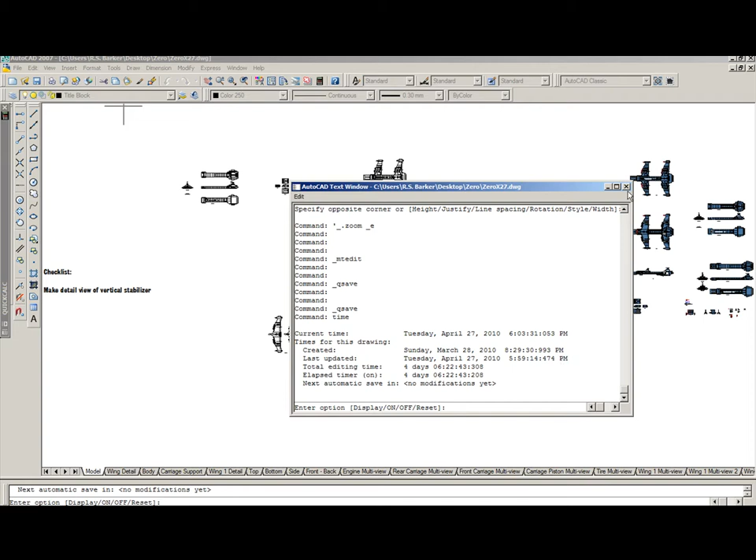So right around 100 hours total is the creation time on these. I've got my little checklist over here of things I still need to do, which is a detailed side view of the vertical stabilizer on the wings. So let's go ahead and get right to it.

There's a lot of information here to present to you, and I've got them broken down pretty much on the left hand side. I'm going to make this DWG file available to you. It's about 2.1 meg in size at this time. It will open with AutoCAD, pretty much any version. This is 2007.

I'm just going to show you some basics here. This is the wing root and the side view of the wings. Wing root, wing tip, and wing base. If you're unfamiliar with that, I'll show you what the wing base is here in just a moment.

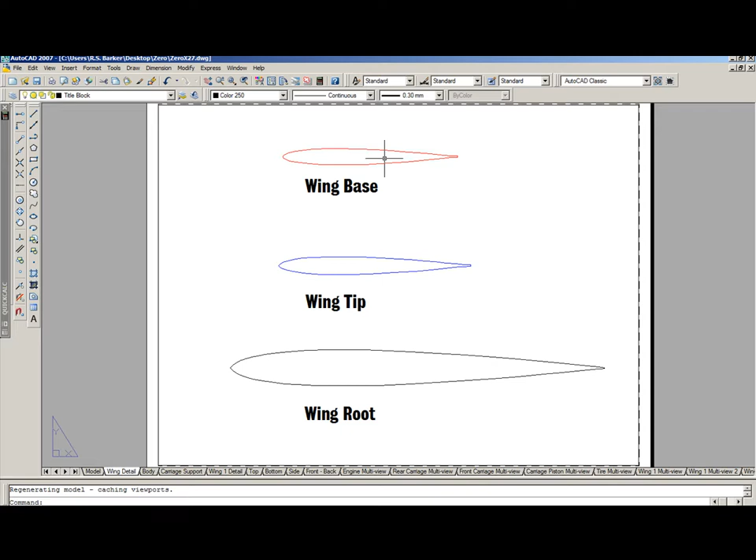And then we have some more detailed information on the front body, or I should say this is just the main body, including the cabin. Just going to kind of zoom around here so you get some idea of what you're going to be getting in this package, and all the drawings there.

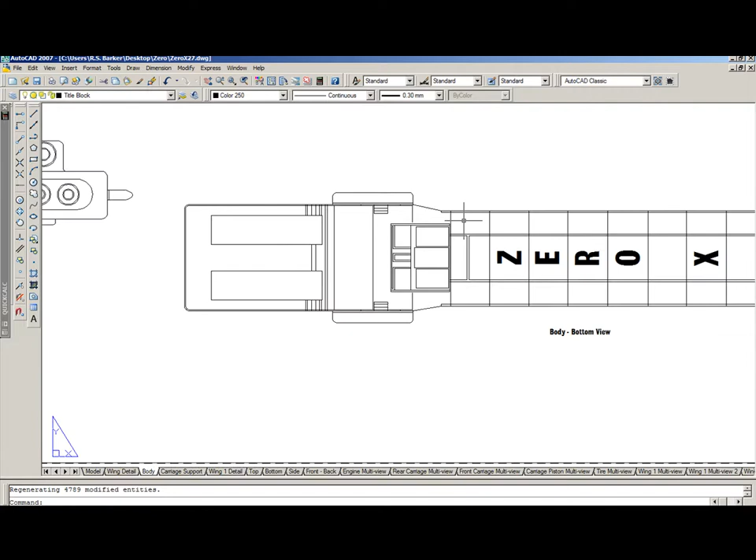On these, I left off the carriage and the wheels just so I would have a little bit more. I could save those for drawings like this. This is a 3 view of the main carriage that is on most of the wheels and their support systems on both the Zero X Wing 2 main body and even Wing 1.

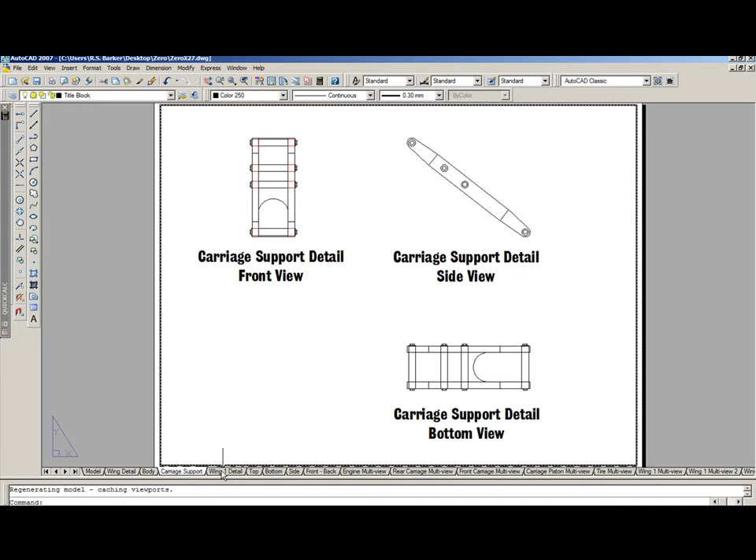And then we have a side view of the wing itself when it's in the folded down position. Again, we can go ahead and zoom on this. This little detail here, the blue is actually behind the red, which are hidden lines. I've got those just normally set up as well too, so you can see those.

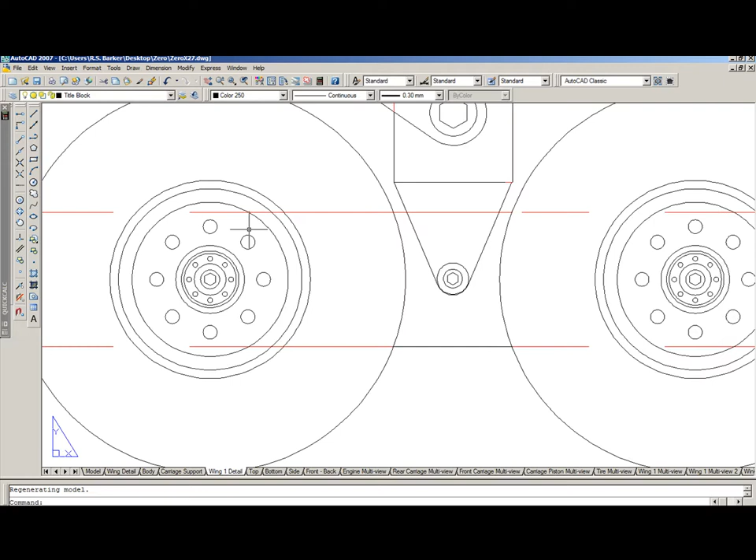You may have to click View and Regen if you decide to open this with AutoCAD. It just recreates these as circles instead of being hexagonally shaped. That's just a little snafu that happens from time to time within AutoCAD.

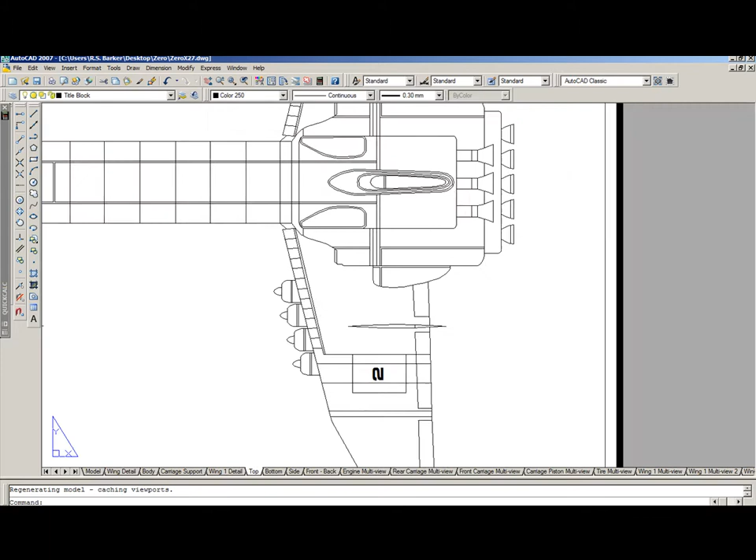Then we have the top view. This is actually where you can see this wing base at. I've got it lined up here. So your wing root would be where it connects to the wing base or to the wing itself, and then we have the wing tip and then the wing base, and that's a negative pull on that. I've actually got those laid out pretty well, but you just get some nice details on this.

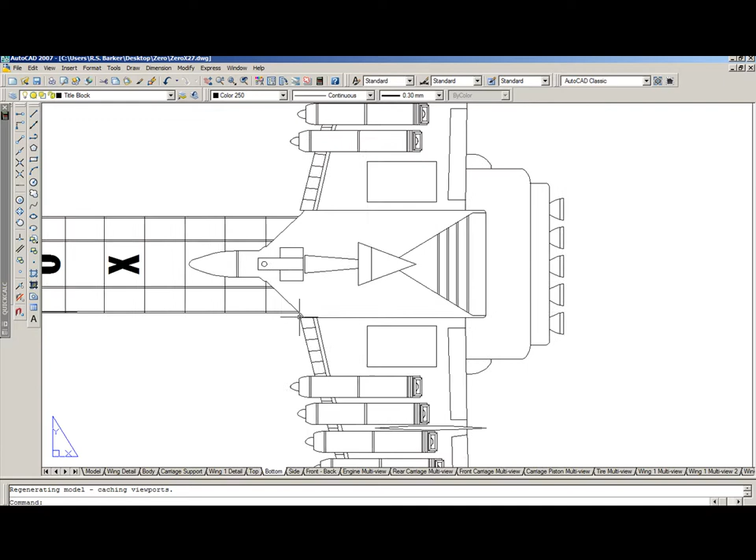And then we have our bottom view, which has really a ton of detail, specifically when it comes to the engines, the Zero X, which of course now, if this was colored, it would be white. I've got them showing up as black right now just so you can see the lettering and where it goes. And I've got these rear areas open, so it would show you where the landing gear would be at.

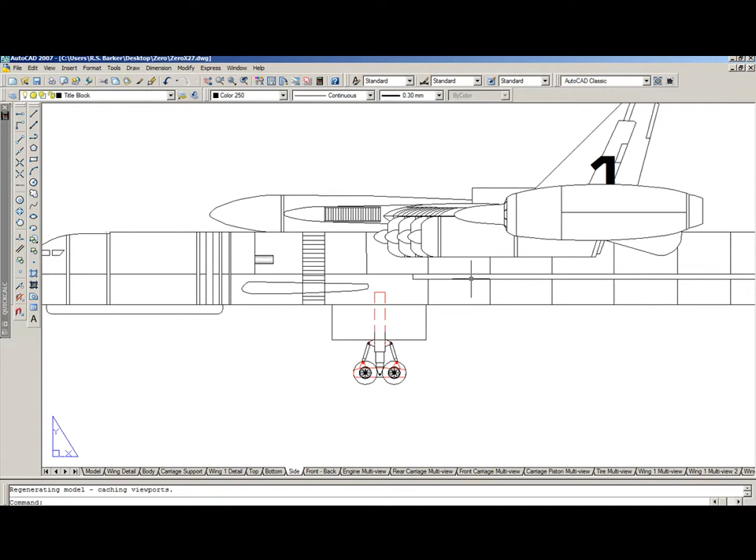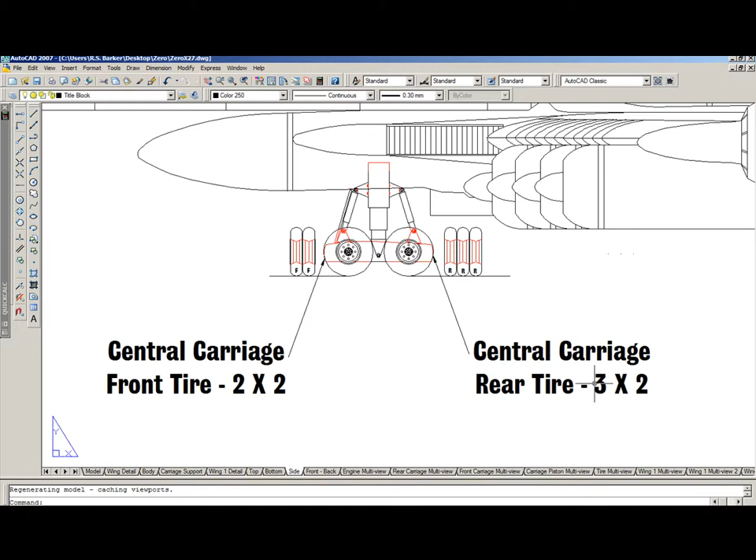Then we have a side view, which has a little bit more detail. It's going to kind of vary from drawing to drawing. Here we've got some details on the front and then the rear, and I even explain this just because in the side view I don't have a 3D view of this at the moment. So like the front of this number 2 wing has 2 tires on either side of the axle, and the rear has 3 on either side of the axle, so it's 2 and 3, and that's just a little bit more information there.

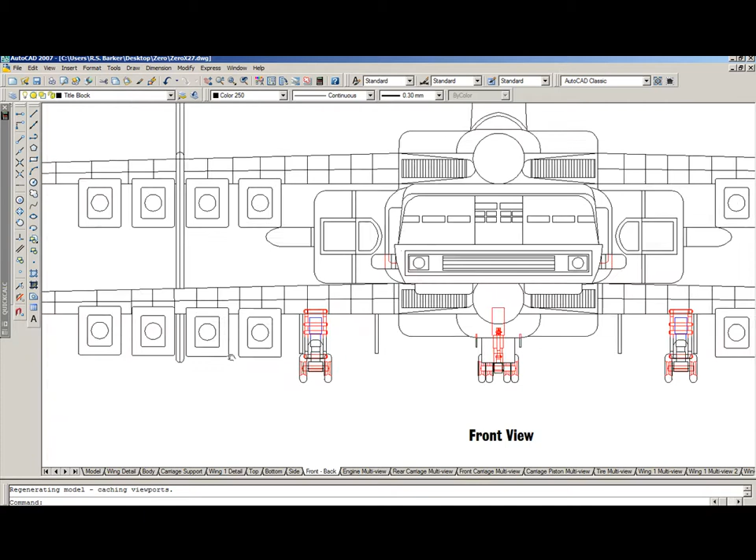And then we have the front back view. Tons of detail here. Again, this may not be perfect. I busted my butt to try to get these done as quickly and as accurately as I can. And I've been correcting and going through and doing little changes here and there, just to bring out more details. I don't know how much is too much. I don't want to go overboard.

This is the multi-view of the engine, including a hidden view from looking at the top of it. I would be looking down on it from the top of the wing, and then the bottom view, and then of course the side view, front and back.

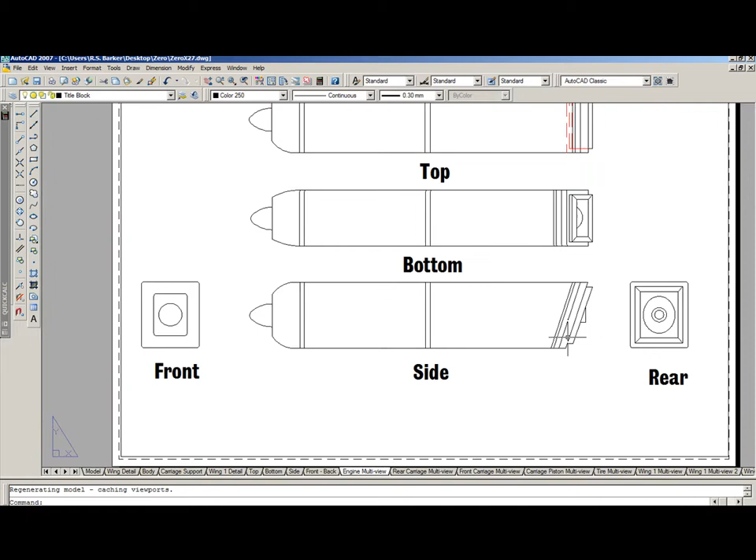And then we go into the rear carriage. I'm not completely satisfied with this, just because I can't think of his name at the moment without going to the forum, but someone said this kind of has an arc to it. I don't know, it's just one of those things that if you can give me better evidence of that, I would be really appreciative of it.

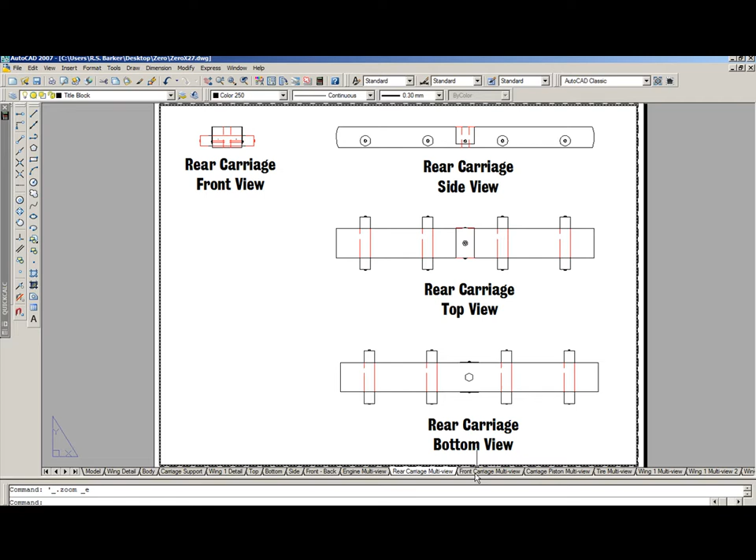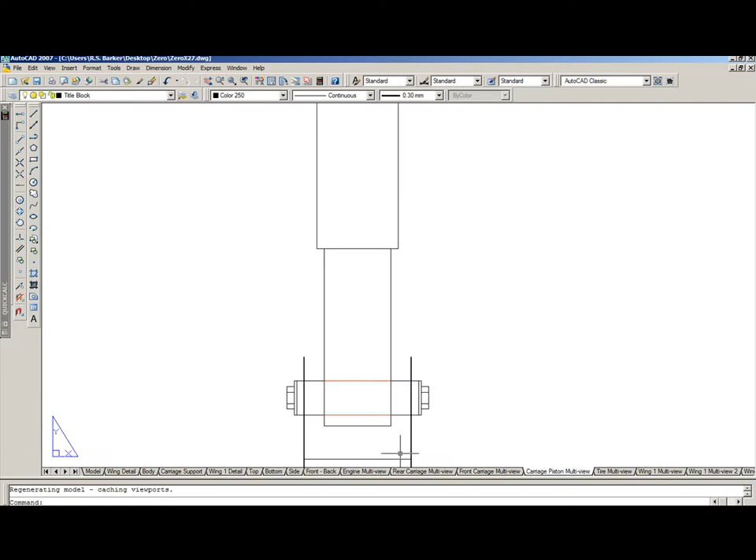Then we have the front carriage multi-view, which does have that little area here in the front that's kind of angled up. Again, it's not going to be perfect. I've got even more details with the carriage pistons so you can see those yourself, and I even have the tire with a hub broken down in there too, so you can see where everything kind of attaches.

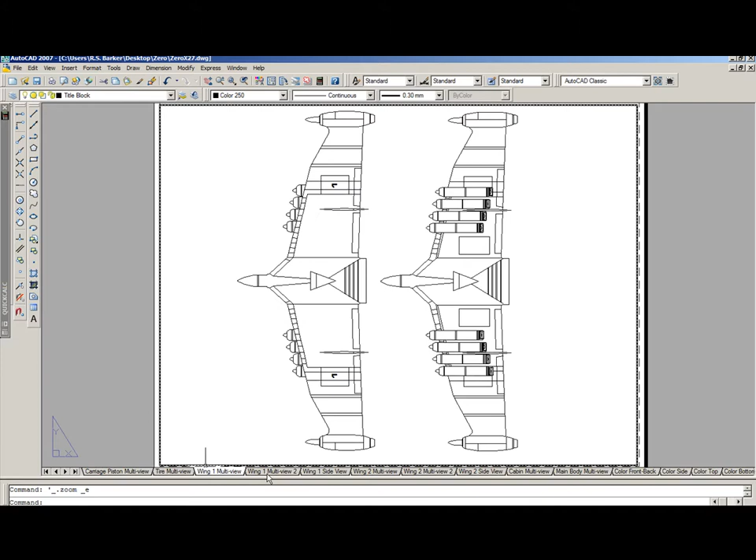Then we go forward to the wing multi-view. As soon as I get back there, there's a lot of drawings here. This again is just the independent wing, top and bottom, and then front and back. It's pretty much the same thing - side views of those.

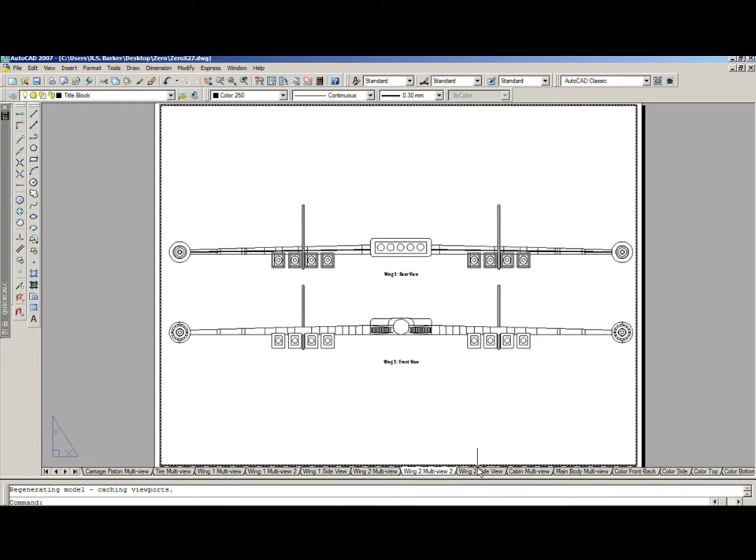And then we repeat that process with wing 2, both top and bottom, front and back, and side. Sorry, I'm a little tired - I've been working on this for a long time.

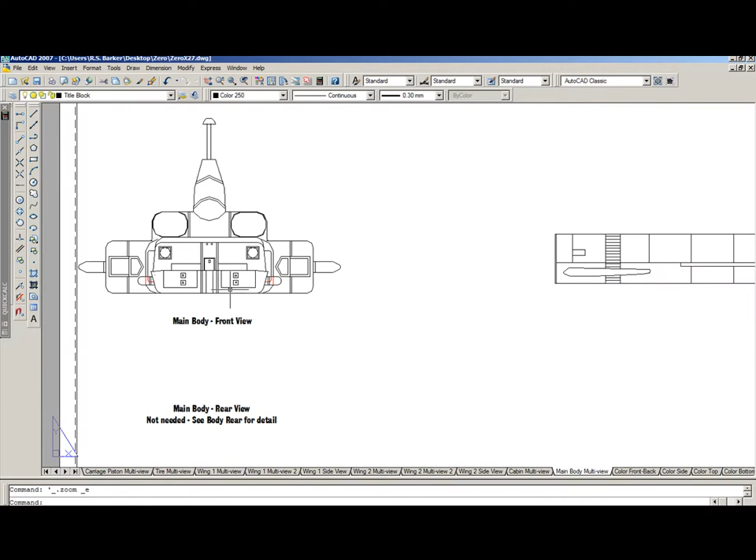Cabin, front, all multi-views again. I've got some details here in the back. Some of that you may wonder about - I didn't go into panel detailing, it just became too much. This view is without the cabin on it, so you can see that in there. I'm going to have to regen just to get those round back to that round view. And I don't have a rear view because it only changes those little front flaps on the cabin itself.

And then we go into color views. I do have some of this as hidden white, just so you can see the outline of where the engines would be, because they're painted black.

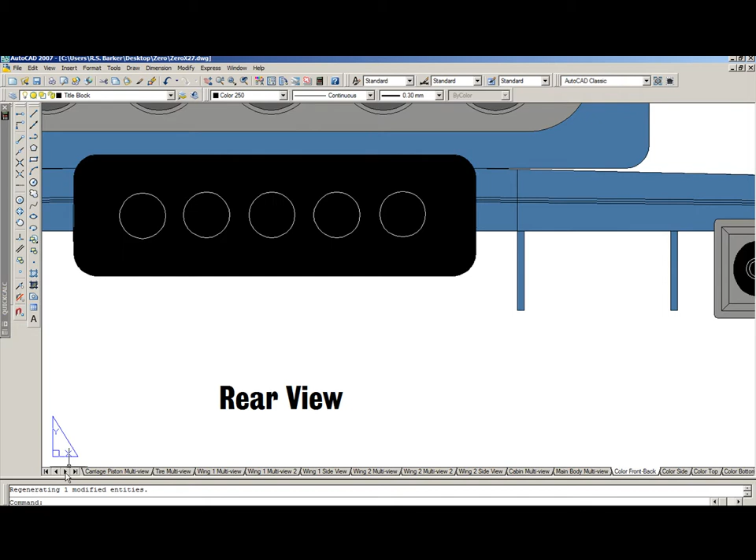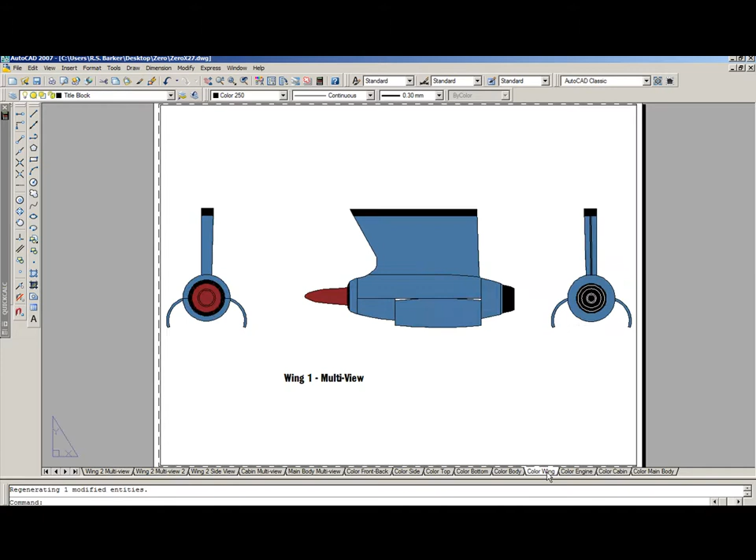And then the color side view here, again this really just kind of gives you different views of these things. Color bottom, the body itself with the cabin in place, the side view of the wing, engine details, the cabin - there's four views so you can actually see what this looks like. And again, I don't have those panel lines in place. I'm probably not going to do that.

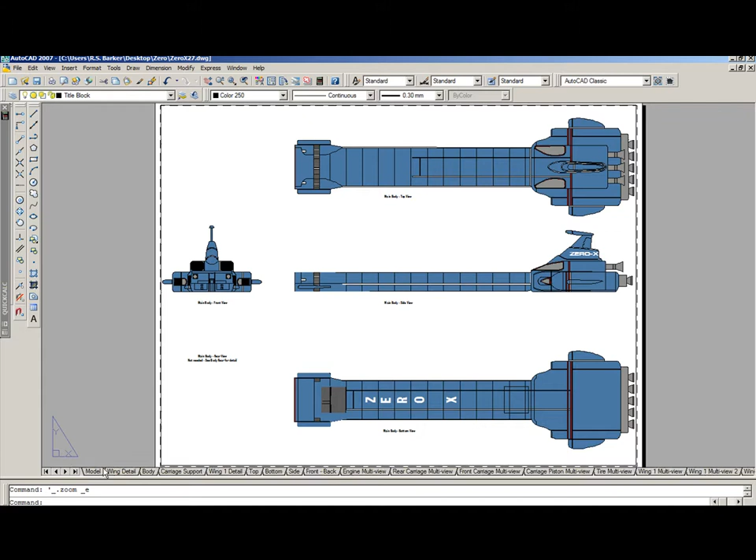And then I do have this cabin view here. That's pretty much it, there's still a couple things I need to do. You may notice I have a thing here to make the detailed view of those wing stabilizers, or vertical stabilizers. That's pretty much it, it's not perfect. I don't know if it ever will be, but I'm going to make this available once I have it done for you, the community, and then I'm done with this part of it.

After that, my plan originally was to create a 3D model. It's not for your use - it's pretty much for my own amusement, and also to give me more skills and more stuff for my own animation and modeling portfolio, so I can hopefully get a better job.

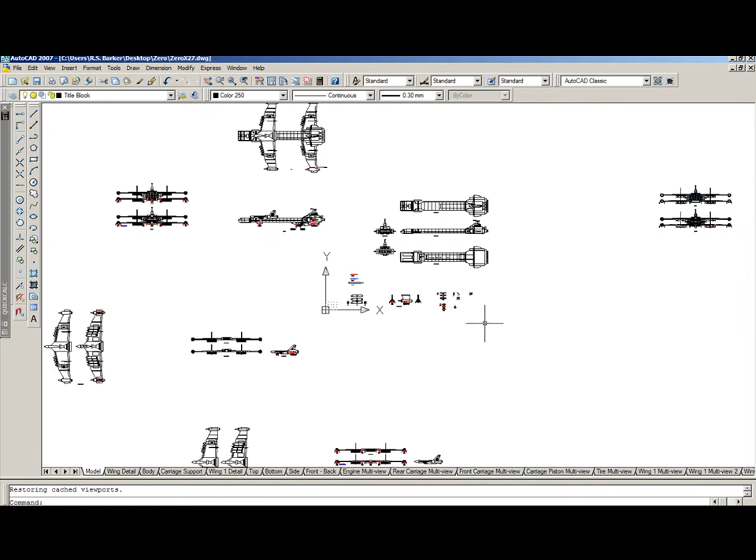I'm always interested when it comes to the Zero X. So you have tons of information here, and I hope that it becomes valuable. Am I going to add dimensions? Probably not, because there is no clear size of this thing.